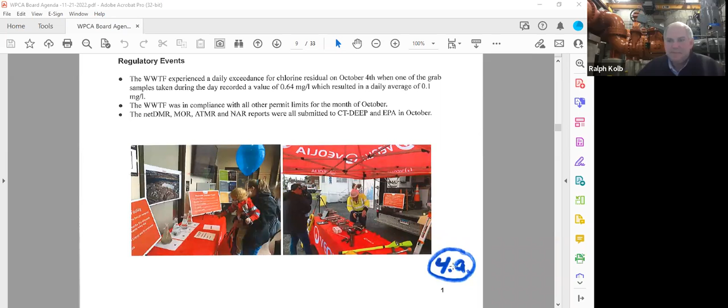The picture on the left is in the office, you can see we had different kinds of water on display — primary effluent water and tap water — to show the differences in the treatment process. On the right is our camera truck, or CCTV truck, and that's our collections manager, Tim Sullivan, showing the public different instrumentation and telling them exactly what they do around the city. So that went very well.

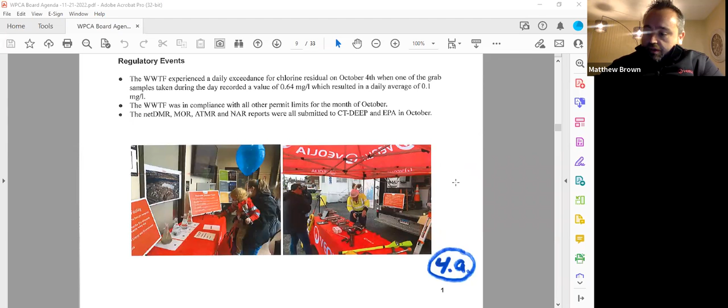Unfortunately I couldn't make it there, but I heard everything was great. So then the Veolia collections team completed over 2.63 miles of TV inspection along with 2.32 miles of sewer cleaning, and they also completed 57 manhole inspections. The industrial pretreatment program, the IPP program, completed 42 inspections and we're on track to complete all inspections by the end of the year.

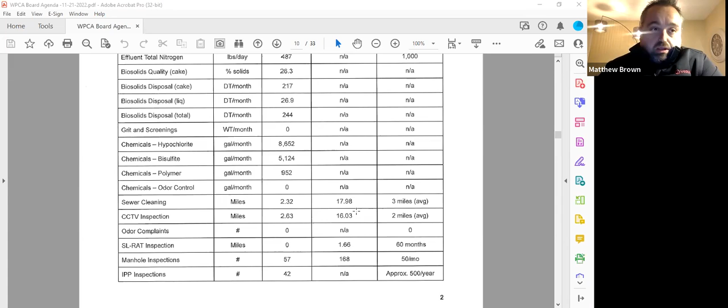We did have one regulatory issue in October, which had to do with the sodium bisulfite pump losing communication with the SCADA system. We sample residual chlorine every 2 hours, so we caught it right away, but it did create an instantaneous limit exceedance. Everything else was in compliance with the permits for the month of October, and that issue was corrected as soon as the operator ran the tests — he went out, inspected the pump, and got it running within that 2-hour window.

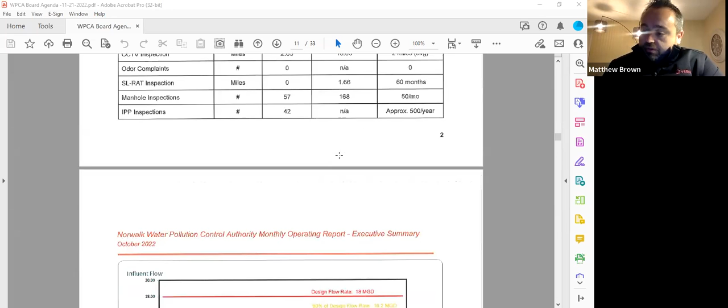The net DMR, MOR, and NAR reports were all submitted to CT-DEEP and the EPA in October. Our average daily flow for the month was 10.9 million gallons, and our 12-month average flow for the plant was 11.41.

Towards the middle of the page, we have effluent total nitrogen. Our total nitrogen is 487.

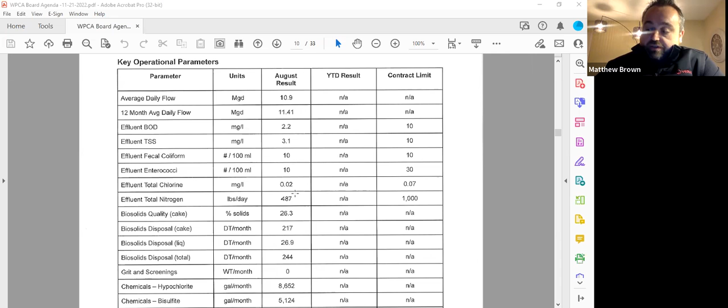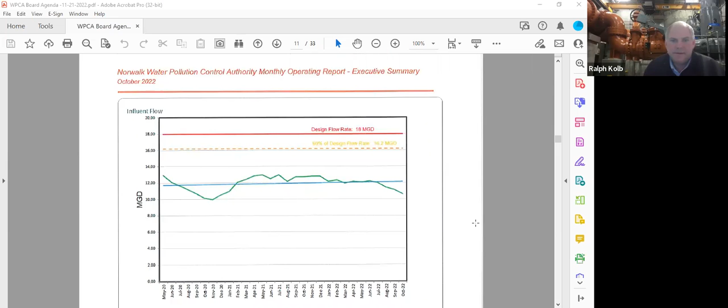And then if you want to go to the graph, Ralph. I believe this is new, correct? That is correct, so this is a new graph we started including in here. It's the rolling average since May 20, when we took over, to now. This is the influent flow.

You can see the design rate is 18 million gallons a day, that's the red line at the top. 90% of design flow is 16.2. That 90% is the number that the DEP and EPA will use to make you plan for upgrades, right Ralph? So that's why.

Correct, it's in our permit. If we hit this green line, the 180-day moving average for flow, if that approaches 16.2, the WPCA would have to submit a plan on either reducing flow to the treatment plant or looking at future expansion. So basically, the difference between the 16.2 and this 180-day moving average is our available capacity at the treatment plant before we have to do anything.

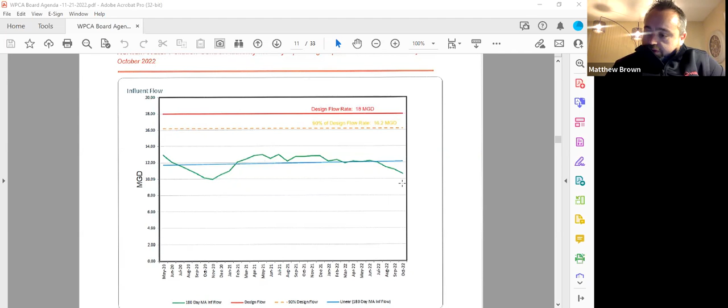I'll point out the dip on the left towards 2020, that was the summer of 2020. We had a very, very long drought, and it was very dry. Some of the lowest flows in the industry people were seeing in the Northeast. But on average, for the past 12 months, we are at 11.41, so we're quite far away from those numbers. I think that was it.

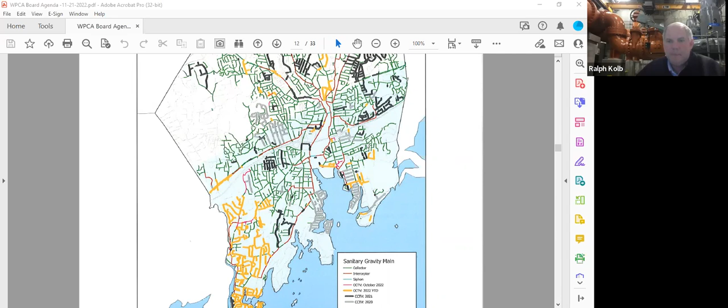And then there's 3 PRFs. You need to share those, Ralph? Or do you want me to just go over them? You could just mention them. Okay, let me just take 1 second to bring them up.

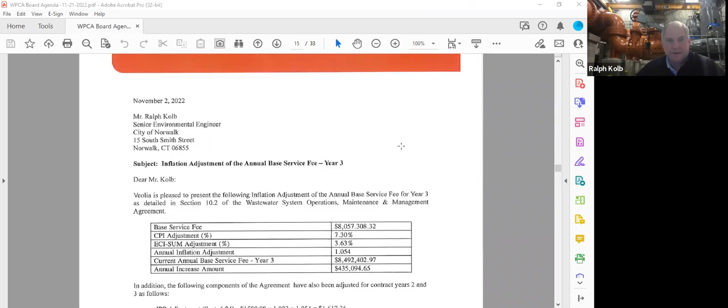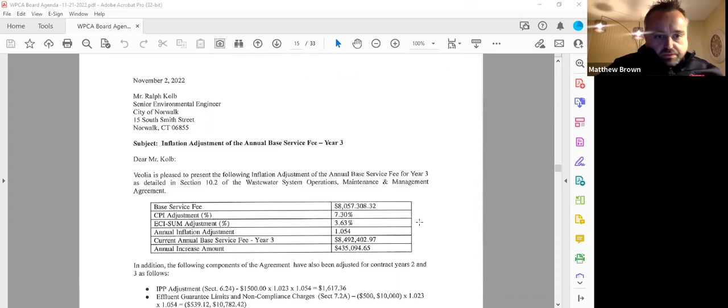Hey Matt, item 4C is the contract year 3 letter, let's talk about that first. I have it on the screen. Oh, you do? All right, let's see. Sorry guys, John just hit... Okay, so the base service fee, you want to go over the CPI?

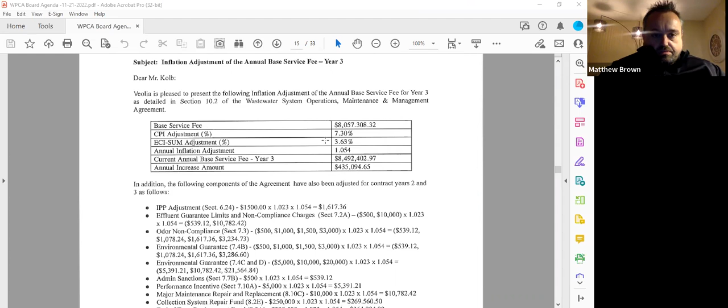Yeah, I can explain this, I'm probably a little more knowledgeable on this, going over it with John. So basically, the contract with Veolia, there's 2 numbers that we look at. One is the CPI adjustment, which was 7.3%, and the other is an employee cost index number, which was 3.63%. And the formula in the contract, when you do the math, it came out to 5.4%, and that's where this annual inflation adjustment number is.

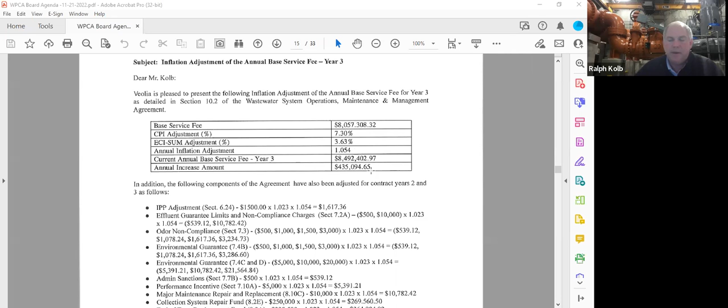It took the base service fee of just over 8 million, times it by that 1.054, got us to just under 8.5 million, with an overall increase of 435,000.

So Ralph, this number will affect as of July 1st, correct? This is going to be shown on the next... No, this was actually July 1st of 2022.

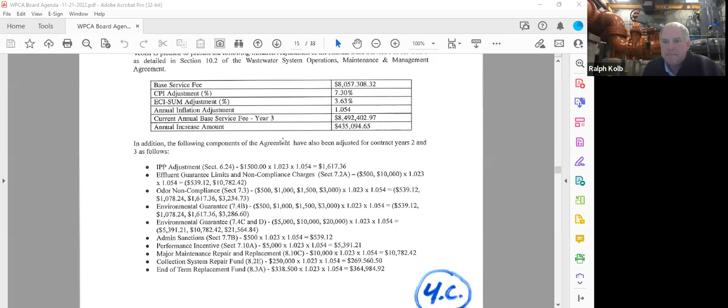Sorry, the Veolia team and myself had been going back and forth, making sure all the numbers were correct, specifically the bulleted items down here. These were all conditions in the contract, and the team made sure all these numbers were bumped up according to the contract language. So we're presenting it a little bit late, but we're in contract year 3 as of July 1st of 2022, and this was the overall increase. Anybody have any questions?

Okay, so I'll jump into these, these are procurement review forms. Something we do in-house for any large projects, you've probably seen them before, we have to fill these out and share them with Ralph.

So this $37,500, this was a backup Chicago pump for our Keeler Brook station. This pump, the Keeler Brook station has, I believe, two pumps, and they're critical, it's one of the critical stations that runs quite a bit. Their pumps are aging, and believe it or not, you can correct me if I'm wrong Ralph, I believe we ordered this pump a year ago and we just got it. Correct, so now we are putting through the statement, because obviously they didn't bill us, so we got it.

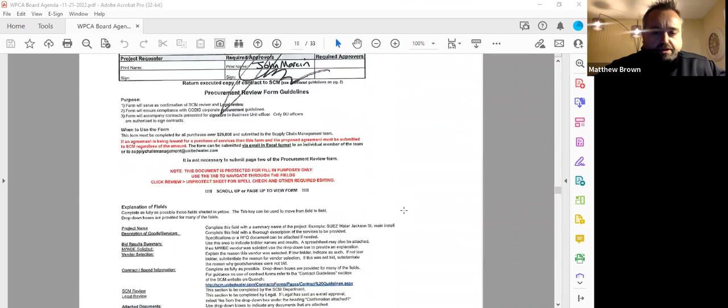So now we're passing on the bill. So this is again a pump - is it a spare? I believe it's a spare for Keeler Brook pump station. It is a spare, but I think they're going to install this and take out one of the other pumps and rehab them. Refurb it. That's correct, yep.

The second PRF is Aaron Associates scum tank instrumentation controls. There was no scum removal in the plant, and one of our larger projects last year was a piping project introducing scum removal to get scum out of our system. So this is for the electronics inside the holding tank that's going to hold the scum before it's pumped, and that's what this PRF is for, this procurement review form.

And then the final one for the month on the procurement review form is the backup float systems. So at several pump stations, I believe this consists of 4 - can't really make it out - Fox Run, Calf Pasture, Howard Ave, and Bell Island. And Huckleberry, oh, and Huckleberry. So what it is, if there's a failure of what we have - electronic level controllers called transducers - and they run through a bunch of low voltage electronics.

If anything goes wrong with those signals, the level controls will fail, and a lot of our pump stations didn't have a backup for that. So what these are is just an old school float - when the float lifts up it turns on, and when it goes down it turns off. A little more intricate than that, but it's a backup to the current level controls in those systems.

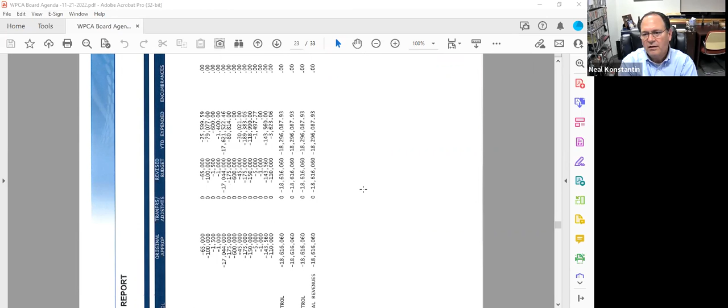Yeah, a couple of questions. Are those pumps interchangeable between stations? You said we're having a backup pump installed in one of the stations. Most of our stations are sized uniquely, so we generally use one pump manufacturer, except for this - this is one of the few stations we have Chicago pump. Our typical pump vendor is Flygt.

So the answer is no, this one would only work in this particular station. It is one of the older stations, so it's actually what we call a drive shaft pump, where the motor's upstairs, a long drive shaft goes downstairs to the rest of the pump, which is the impeller and the volute.

Gotcha. The problem we faced when we came here, when we took over, and just in general, a lot of the pumps either had spares that needed to get redone, or some stations didn't have spares at all. So Ralph and our team have worked together to take inventory of all these pumps and make sure we have a spare for every single pump station, so if there is a failure we can get up and running in as little time as possible.

Gotcha, and Matt, just to add a little bit onto what you just said, every pump station has redundancy installed at the station, but we also like to have a pump on the shelf. So there are like 5 or 6 stations that have this equivalent spare pump - we don't have to have 5 or 6, we have 1 or 2 that'll work. They're sized to handle the same total dynamic head, which is basically an engineering design for that station. So they're all very similar in pumping capacity, but for most of the stations we actually have a unique on-the-shelf pump, besides the 2 or 3 pumps at the station.

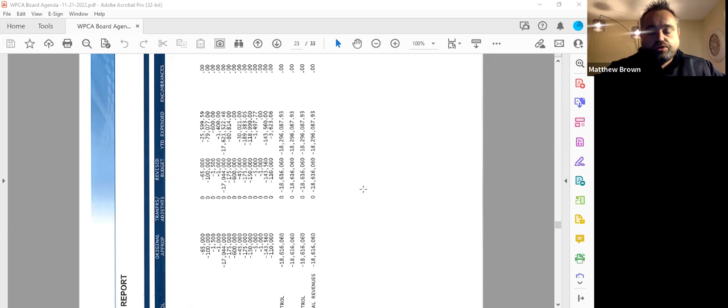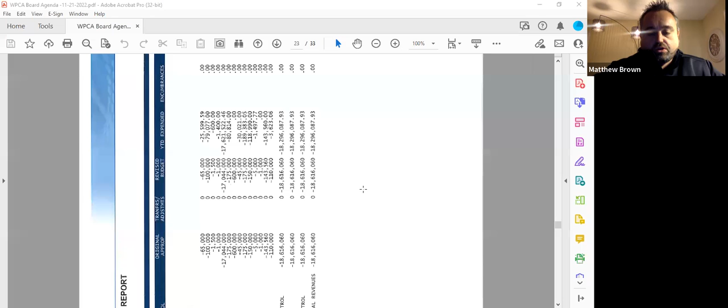One of those pumps is designed to be a lag pump, or a redundant pump. And as triple security, we have one on the shelf. That's right, kind of standard practice. Some of our older stations that are due for upgrades will maybe be using both pumps to keep up due to expansion and things like that. But the standard practice is to have a redundant pump already installed on site, and then one on the shelf. So that's what we're going for.

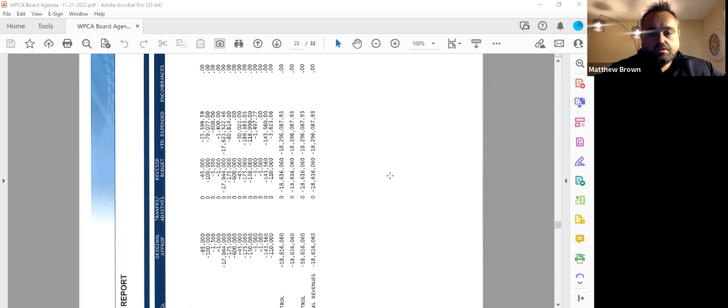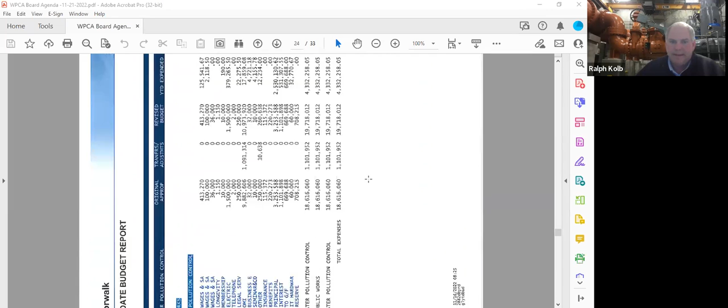Item 5A is our typical fiscal year 22-23 Munis report, revenues and expenditures. I won't go into any detail, but if anybody has any questions, please let me know.

Item 5B, discussion on the WPCF facility plan update. The team has a wet weather meeting scheduled for December 1st. It's a workshop with Arcadis. As you know, we're in the process of preparing the facility plan update. It's due to the state by June 30th of 2023.

The other thing to note, we had submitted a Clean Water Fund application for grants from the state for a 55% grant. That's actually been moving along. That's about $260,000 that the WPCA is going to receive through this process. So we just got an email a couple days ago from the state requesting the WPCA chairman to sign off on the agreement, plus there's some other documents we have to provide. But like I said, we're moving in the right direction on that, receiving that grant. So we're very excited.

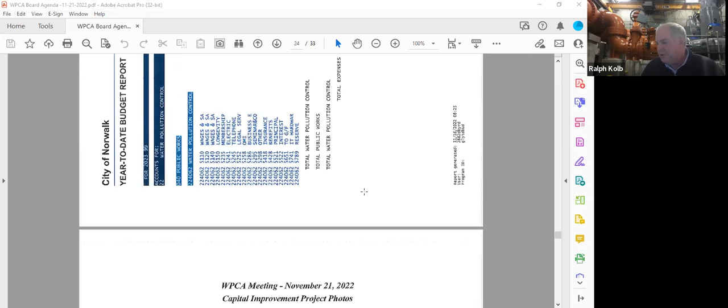Item 5C, what we're trying to do, instead of just talking about the WPCA capital improvement projects, we're looking to show everybody photos. So that being said, at the treatment plant, the aeration tanks electrical infrastructure project improvements is complete.

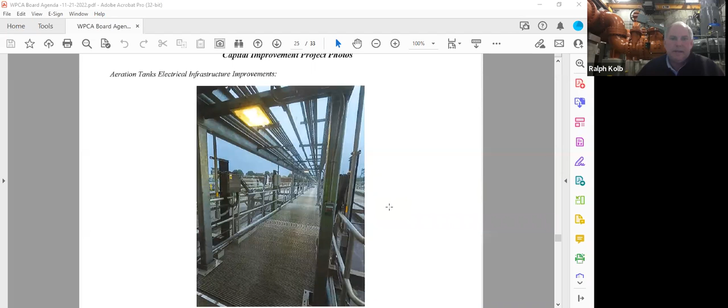The main task was the steel support system that you can see going in between the two aeration tanks. This is carrying both higher voltage and low voltage for our pumps and motors, along with our SCADA programming. So there's a lot of controls out there on these tanks that there's new conduit, new wiring for. And then this also gives us a building block as we make improvements over future years, that new conduit and electrical can be run on the same structure system.

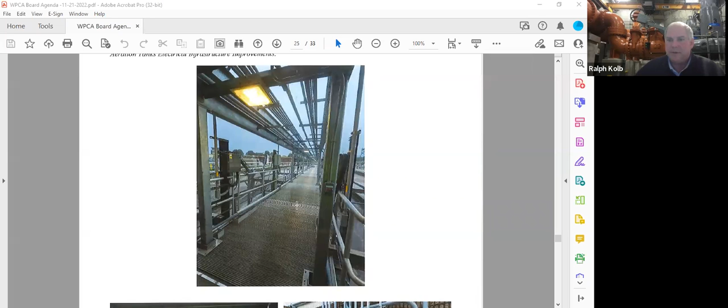That way, the whole purpose was to move it out from below the grates. It used to be below the grates, and what would happen, water would find a way into the conduit and create shorts or electrical problems. In addition to this, we added LED lighting, so operators at night can turn on the switch, walk down, and have a lot more lighting to see what they're doing, grabbing samples or monitoring the tanks.

This is all outside the solids handling building where the MCC is actually located inside. Everything is new from the building out. So you can see the control, the boxes or the wires coming in from inside are split and then running out to each of the tanks. This was just over a $1 million project. It was actually completed a little bit earlier than we anticipated, even with some of the delays from COVID. So we were very happy, and right now we're just doing a few punch list items.

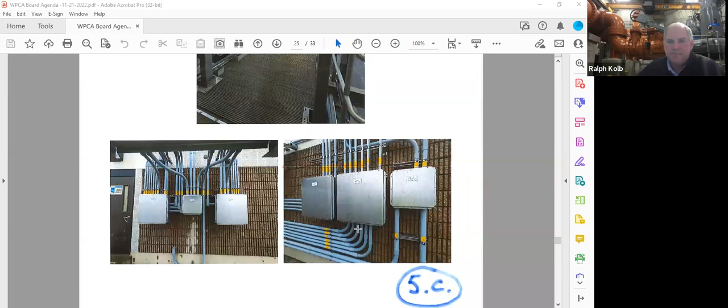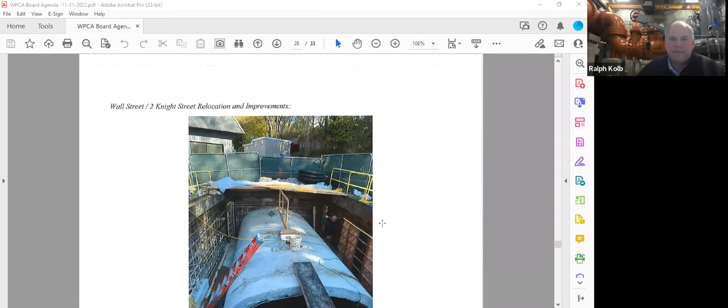The second project we have going on in the collection system is our Wall Street to Knight Street relocation project. What we're doing here is we have a 30-inch oval pipe that goes underneath Knight Street. We're trying to, this project consists of moving it from underneath the building and getting it to a point around the structure. In order to do that, we actually have to put our pipe through what you're seeing here, which is a 77 by 122-inch storm pipe.

So right now, this bluish pipe cutting through is our new sanitary sewer 30-inch pipe, and this is the old storm pipe that's active. What we're doing, once this pipe is done, we're actually making a box around it, because the whole intent is not to lose the pipe capacity for the storm flow flowing through this large diameter pipe. When it gets to where we're crossing, it's going to expand into a larger chamber and then back into the pipe, so that way we can maintain, I think it's like 940 CFS in that pipe for future conveyance.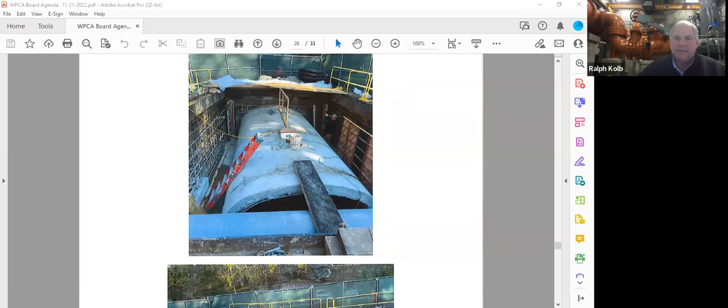We have a couple pictures. You can see it's all the geotech, it's where all the expenses are, and right now this rebar in here is where the chamber is going to be. So once we're done and pour the walls, we're going to open up this pipe. Everything will be sloped, so it allows the stormwater to actually flow underneath our new sanitary pipe. And we have secondary containment, so that way we don't have any concerns about if the 30-inch pipe, you can see the blue pipe, if that was to fail or leak where it'd be leaking into the storm, we have secondary containment already designed.

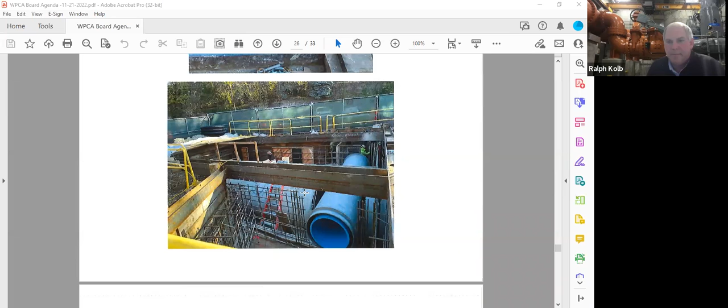So this project is about 2.2 million, and we're anticipating construction to be completed in the March-April timeframe of 2023.

The next project is our Bell Island pump station improvements. Sorry, there's a misprint here. What we're always trying to do is reduce risk at our pump stations and at our facility. So in this upper left picture, that's the force main.

It's an 8-inch asbestos cement pipe. What a pump station does is flows by gravity from the local neighborhood to a pump station, and then the pumps pressurize a pipe and convey it up to a point farther away to a high point.

From there it can flow by gravity to the treatment plant. So if we were to have a failure or a problem at the pump station, we'd end up having to bring in tanker trucks to continue to convey sewage, so it doesn't back up in people's homes or spill onto the ground. Or the other option is to bring in a Godwin pump to suck from the gravity line going into the pump station or the wet well itself.

But now you have to run a flexible pipe or hard piping on the surface to wherever you need to pump to. For Bell Island, it actually pumps to Gold Road and Pine Point Road, which is like 1,400 feet away. But when you run piping on the surface, you're blocking driveways and roads. You're creating a public nuisance.

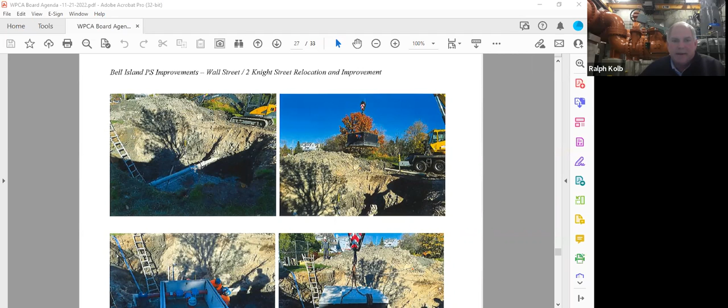So what we ended up doing was cut out a section of the force main and installed this vault with valves. Here you can see we're connecting it upstream and downstream. This allows us, in an emergency, to come in with a bypass pump and take the suction hose.

We install that into a gravity manhole, which is adjacent to this vault, to suck sewage from. The discharge from the pump connects into this bypass connection, where I have my cursor. Then all we have to do is open and close valves, and now we're using the pipe that's in the ground to convey sewage from the Bell Island area while minimizing impact to the residents.

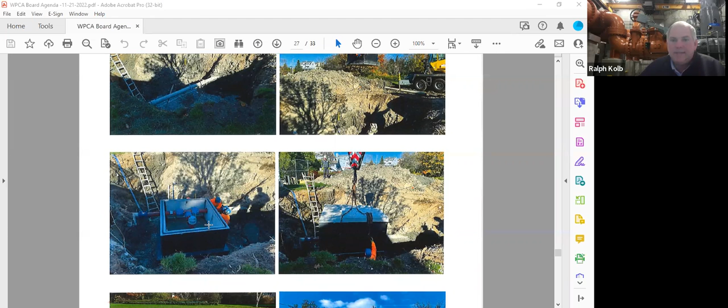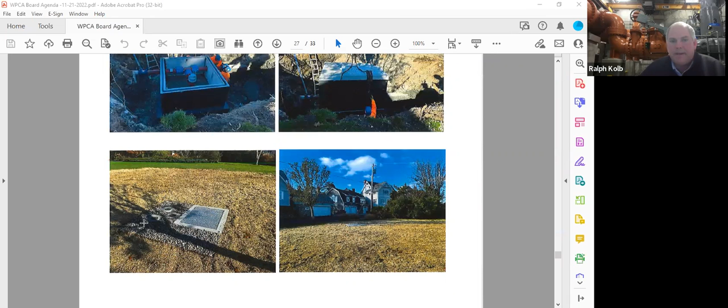Once we installed the vault, about a 12 by 12 foot vault, you can see here we have a hatch to access the valves, and the ability to operate the valves from the top at grade. Here are the 3 valve boxes, and this is the restoration that was just completed a couple weeks ago.

This is what we're calling winter restoration. Come the spring, we'll go back and work with the Bell Island Association to restore the area to how it was before we disturbed it. I know the biggest thing is grading and getting grass planted again, so that'll take place in the spring.

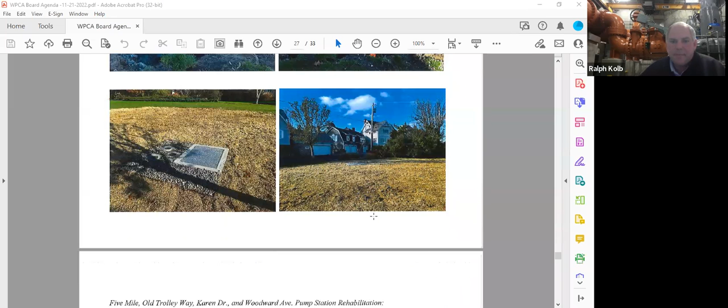Next project I have for discussion is our pump station rehabilitation project at 5 Mile, Old Trolley Way, Karen Drive, and Woodward Avenue. The first couple pictures are from the 5 Mile pump station. We have a new service that was just put in, and here's the new generator concrete pad. Not a lot of work has taken place because the electrical has really slowed down the project.

There's been a lot of back order. Some components, like the generator, are over a year out from when we ordered it in early January this year. So once it went through the engineer design, we went out to bid, the contractor submitted packages for review by the engineer to make sure it conformed to the design. Once we gave the okay, they put the purchase orders in January, and for the MCC's and generators, we're still waiting for components to be delivered to the site.

But as soon as that stuff does come, we'll be ready to go. All the mechanical piping and new pumps have been received, and it's stored right now at the pump station.

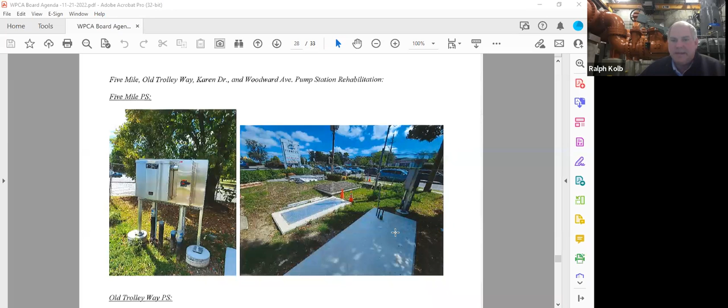Here's Old Trolley Way pump station, where we did the same thing. The Kovacs contractors added piping for a bypass connection. The valves are inside the pump station, while the connection is outside. We tie the discharge line from a Godwin emergency pump into this flange, then open valves inside the pump station to utilize the conduit and pipe in the road to convey sewage.

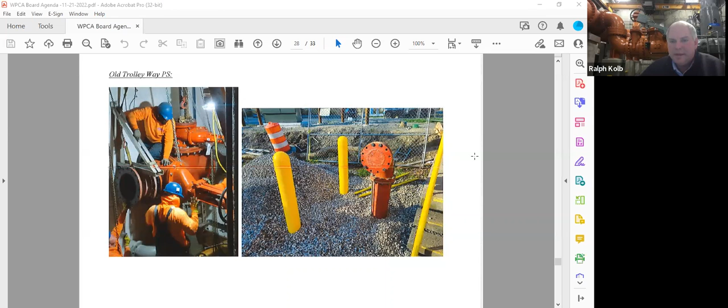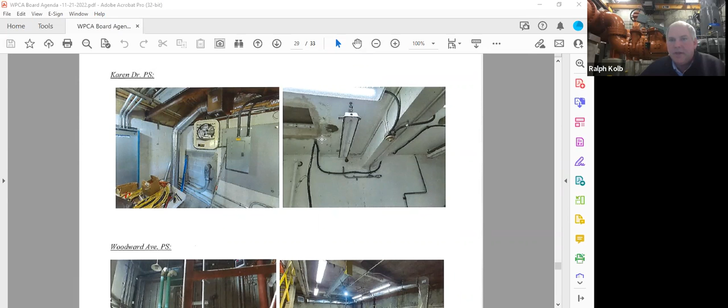At Karen Drive pump station, we're adding more HVAC, electrical, heaters, and LED lighting. This is some of the work that's been going on. At Woodward Avenue pump station, again a lot of HVAC and LED lighting work.

We also have bypass piping and a new bypass connection outside the building, same as Old Trolleyway that we've installed.

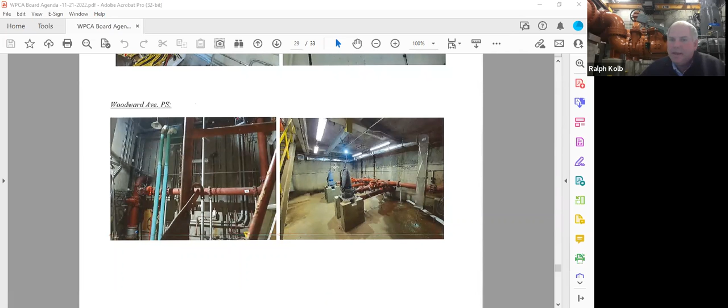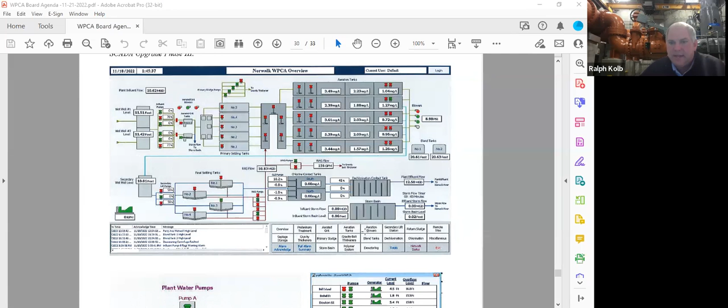The last project is our SCADA upgrade phase 3. I shared a couple of screenshots. The first screenshot is what the operator sees on their overview screen, showing the whole treatment plant and various levels, pumps on, DO levels, and flow going through the facility. These little tabs let you zoom into a process at the treatment plant, like preliminary treatment, aerated grit, aeration tanks, or aeration blowers, giving a lot more detail.

Some of the things we've done recently enhanced the system. Here's our plant water pump. We're recycling treated wastewater, which we now call effluent, before it's discharged out to the sound. We're recycling it at just over 1,000 gallons a minute.

As you can see, pump B and pump C are red because those are online, while pump A and D are green because they're on standby. We're pressurizing our plant water and using it for hosing down throughout the facility, with sprays at the aeration tanks to help with the process. That screen gives us more information to know the pumps are operating, if there's an alarm we'll get an alarm, and it gives us the pressure rate and flow rate, so we have more eyes monitoring the system for us.

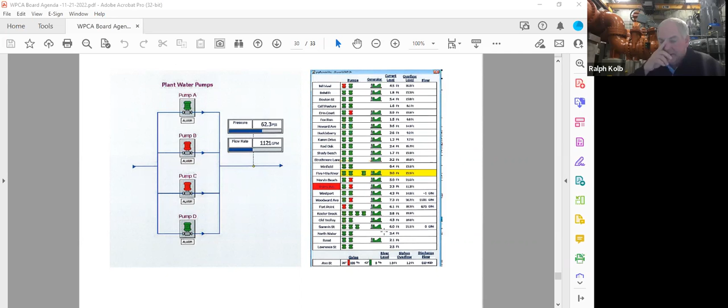The picture to the right is really useful for the operators. It gives us a view of all 22 wastewater pump stations and 3 stormwater pump stations, listed by name in this column. Then pumps—we either have 2, 3, or even 4 pumps at a station. Red means on, green means ready for standby.

This yellow you see is pulling the data from that station. Every 2 to 3 minutes, through a radio system, it's pulling the live current data from each station. Then we have a generator column that tells us if the generator is on or ready for standby.

The current level means the depth of the wet well level, so we know if we have a concern, if this level or the pumps aren't turning on and we have an alarm, we can monitor this level. We know if we're going to have a potential sewage spill based on the overflow level column. As long as the current level stays below the overflow level, we're good. This gives the operators direction—if we have 1 or 2 stations with a problem, they can direct crews on which station to get to first based on live monitoring.

Some stations also have flow meters, and that's what this column provides, the flow rate at the station. Then the last piece is down here.

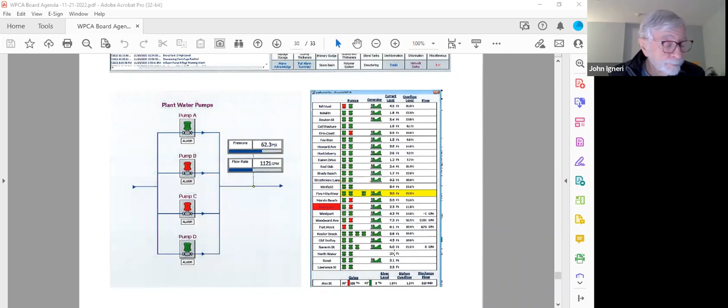Thank you. Good background. We'll try to do this now going forward, giving pictures versus just talking. I like the pictures, yes, that's why I figured. Thanks for adding that, very helpful, thank you.

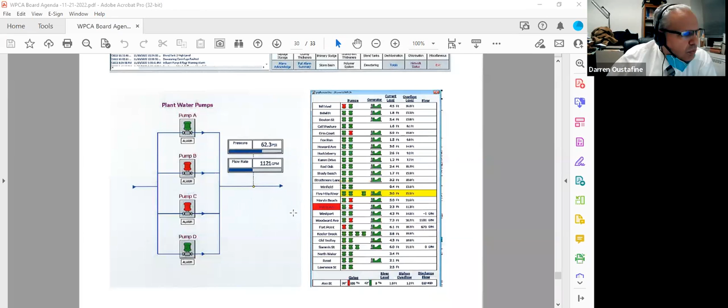What could you possibly do, Ralph, at the Ann Street siphon if the level starts coming up and the storm's not too bad, but it sounded like you monitor it. What could you possibly do? Good question, Mr. Chairman.

Here's the answer. Down here we have gates, a 30-inch and a 42-inch, so there are actually twin siphon barrels. In SCADA we have a program, an SOP, where the 42-inch siphon is closed, 100% closed, or zero percent open, and the 30-inch is always at 100%.

If in a rain event this level starts to go up, and we get to about 5 or 6 feet, this 42-inch gate will start to open, in increments of about 25%. Before we hit the 8-foot setting, we're well before we hit 9.25, this 42-inch gate will be at 100% open at 8 feet. And now we're maximizing flow to the treatment plant.

Got it, so that's basically we're doing as much as we can to allow flow to the treatment plant. What's also happening at the facility, at the Headworks, we have 6 main lift pumps. As flow increases to the plant, you go from 2 pumps to 4 pumps to ultimately 6 pumps running at 100%, pushing around 100 million gallons a day of peak flow through the facility. So we'll be maximizing our facility. During Ida, we had 6 main lift pumps on at 100% to try to push as much flow through the treatment plant as possible.

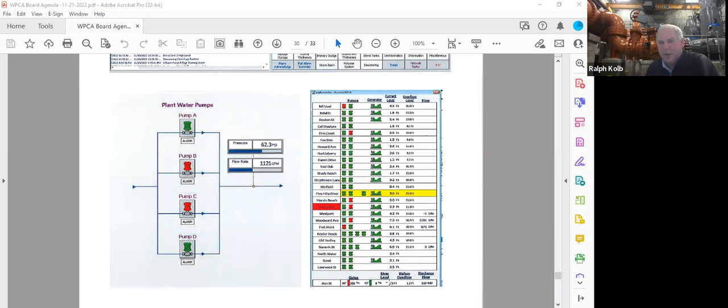It's a permitted outfall, so we're allowed. We're trying to minimize outfall 2 discharges by using our storage capacity, but we're trying to avoid an Ann Street overflow discharge at all costs as well. It's all programmed in SCADA, and it really comes down to the intensity of the storm, and to what level of storm intensity, and is it an act of God storm, like Ida.

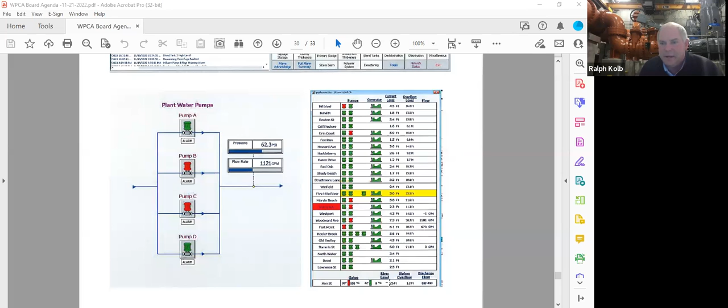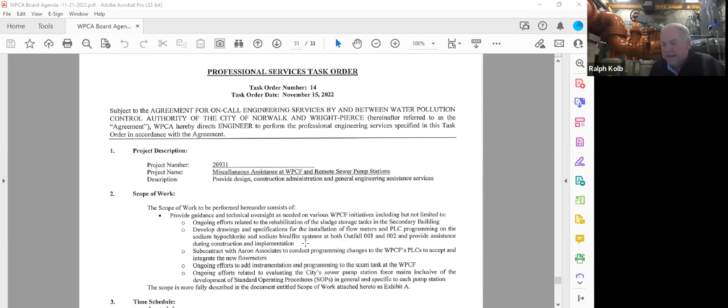Thanks, Ralph, thank you. And then sewer use bills and appeals to date, there hasn't been any adjustments since last month. We're still at $39,341.

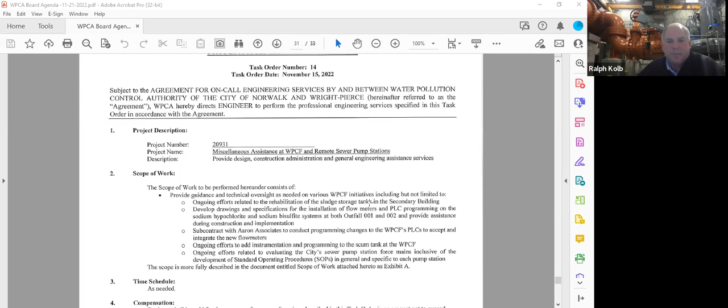The last item is an information copy, a Wright Pierce task order number 14. It's providing miscellaneous assistance with pump stations and at the treatment plant related to pumps, in the amount of $65,000. This isn't a new contract. This was monies already approved by the board in a prior contract, and we're just tying it or linking it to a task order with Wright Pierce.

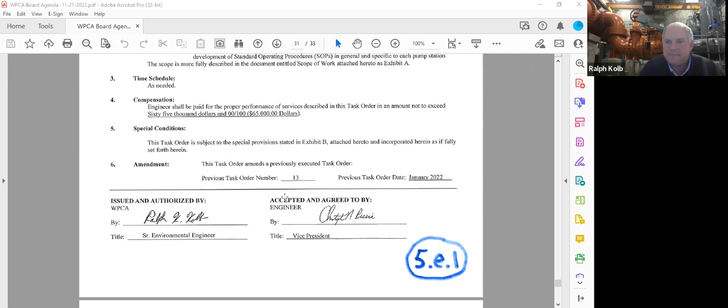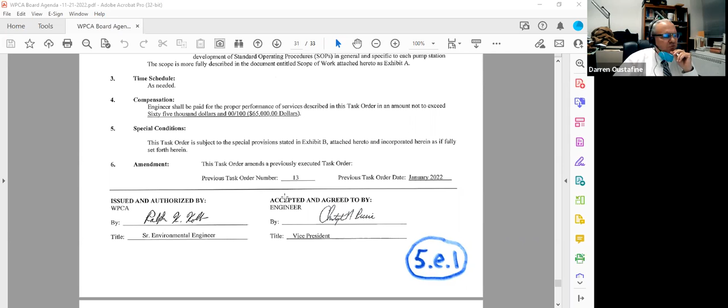That's it. Any questions for staff? No questions for staff. Any questions about anything on the agenda or not on the agenda? No, okay, it is 6:08.